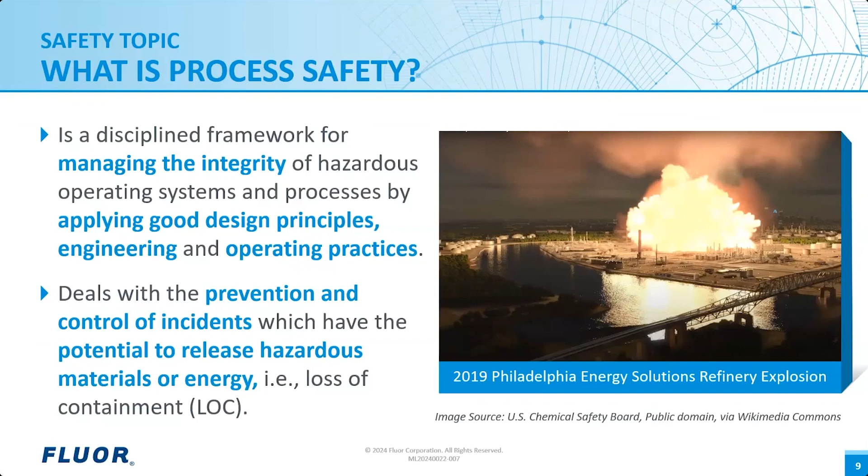To assess the risk associated with the loss of containment scenarios, it is typical to perform quantitative assessments in addition to qualitative analysis, as it provides more detailed information which can assist in identifying the protection requirements of the facility. But before we dive into the differences of the two approaches, I would like to do a quick review of the definition of hazard and risk. Most of the time, they are used interchangeably, but their meanings are different.

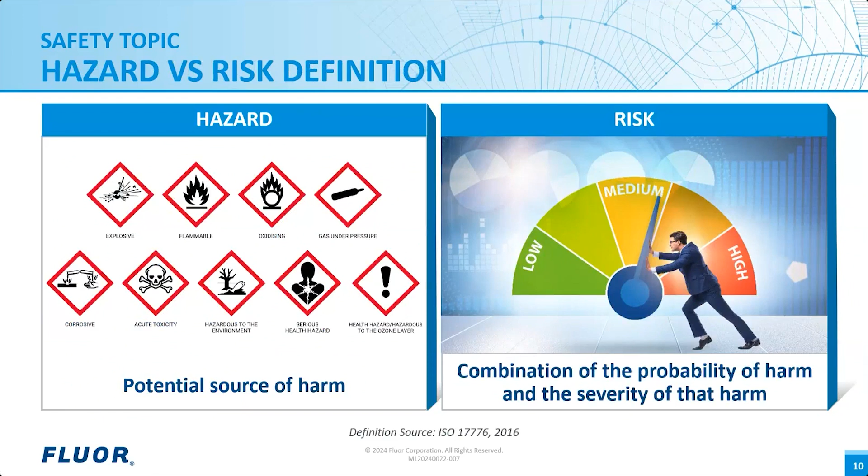Hazard is basically a source of harm, and risk is a combination of the probability of a hazardous event and the consequence of that event. More on risk. Risk is a product of probability and consequence. Probability is basically the likelihood of an incident occurring, and consequence is the severity of the outcome following the release of hazard. It can be, say, if we are talking about impact to personnel, minor injury to fatality.

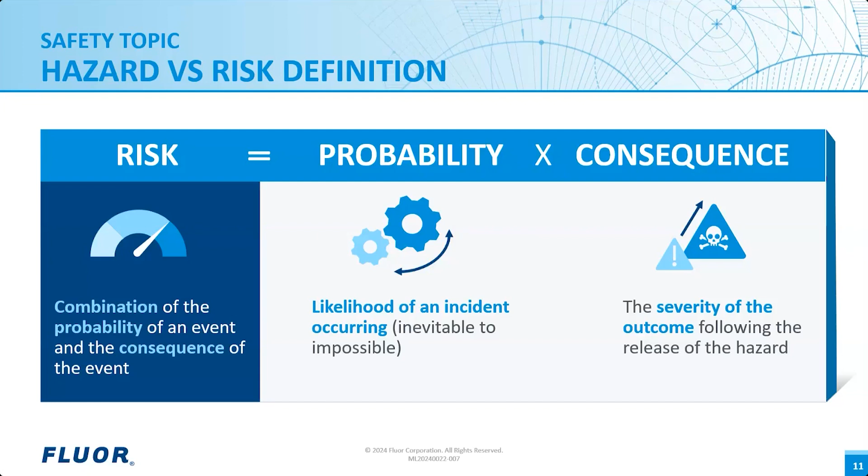Consequences associated with these leaks are modeled, but no frequency analysis is performed. Based on the consequence modeling result, specialists will check if the consequence criteria is being met. For example, if the consequence criteria for emergency equipment is 15 kilowatts per meter square, and based on fire modeling, the emergency equipment is outside that contour, then no additional protection is recommended.

As for the risk-based assessment, this will consider the full range of representative leaks, from small leaks to full rupture. Consequence modeling will be conducted for the full range of leak sizes. Frequency analysis for all representative leaks is performed to determine releases, ignition risk, and the frequencies, etc.

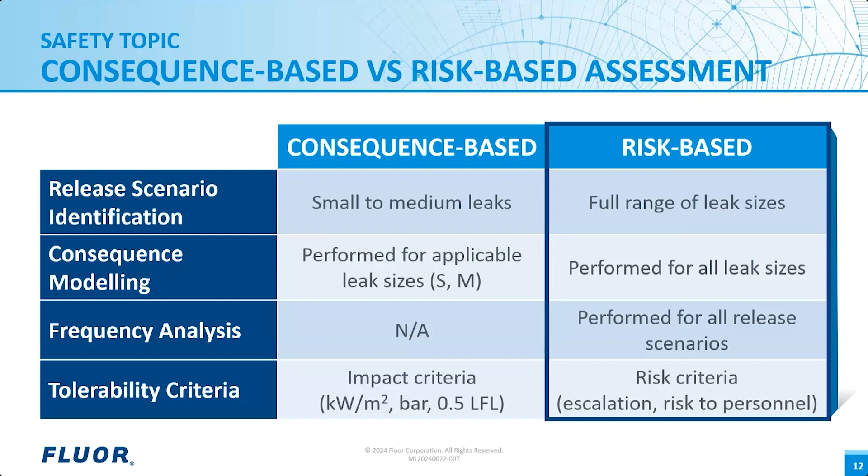To begin, let's go through the objectives of the presentation. Process safety revolves around keeping hazardous fluids inside process systems, or in other words, containing the materials. Loss of containment incidents, which are also referred to as LOCs, can range from a minor flange or pump seal leak to a catastrophic rupture of piping or equipment. Both the severity of these events as well as their frequencies can vary. Undertaking the right hazard and risk assessment enables the project team to examine the effects of the full range of LOC events and provide risk reduction measures to manage the risk associated with them.

Each of these HSE assessments have their specific objectives and are tailored for specific leak size events. This presentation shares a holistic view of how the full range of LOC scenarios are covered by various hazard and risk assessments that we perform at Fluor. It aims to help you understand the objectives of different assessments Design HSE performs, as well as their scope and limitations.

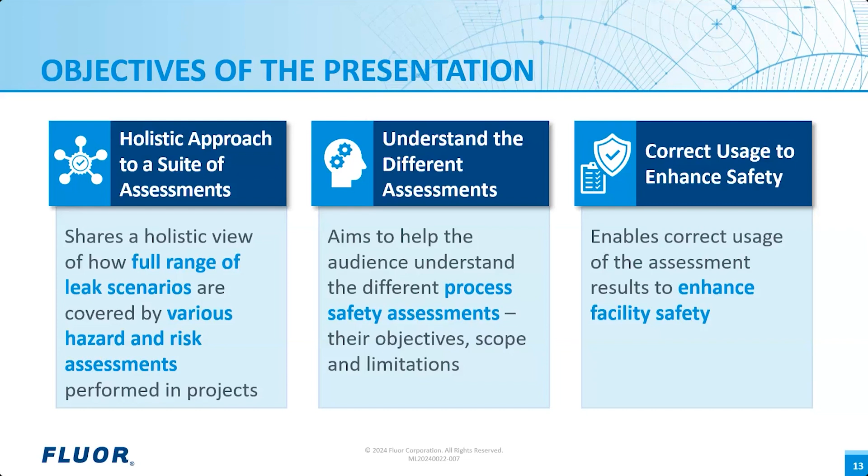Today we will present a selection of HSE assessment methodologies, explain what they are, and to which leak sizes they apply. We will discuss hazardous area classification, process hazard analysis, layer of protection analysis, HSE input to facility siting and plot plan development, fire safety assessment, critical building risk assessment, and finally, quantitative risk analysis.

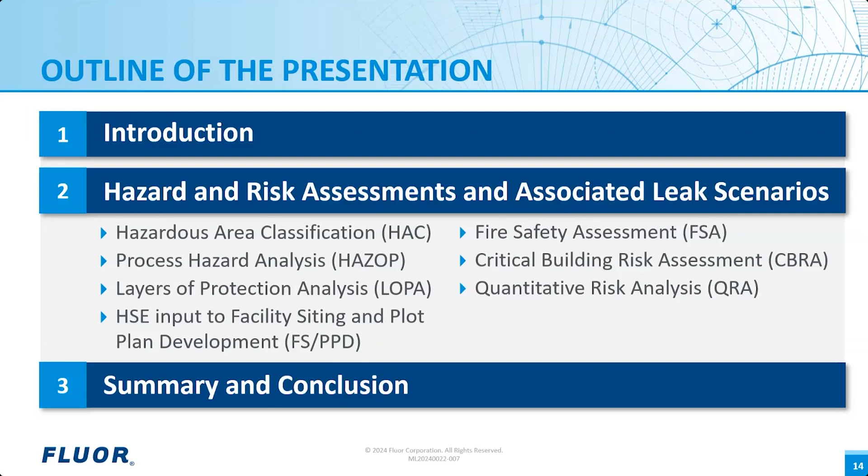Reducing risk can be achieved by reducing either of the two components, the severity or the likelihood. The preference is to reduce the potential severity of an event and make the process inherently safer. For example, eliminating certain hazardous substances altogether or reducing the inventories. Now, if the potential severity cannot be reduced, the likelihood should be reduced. So for example, adding a PSV does not completely eliminate the risk of overpressure and subsequent vessel rupture, but they do reduce the likelihood that this actually happens.

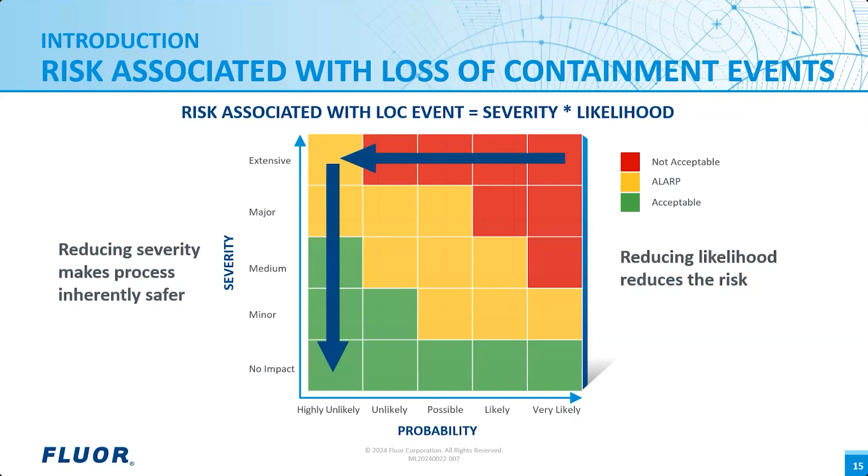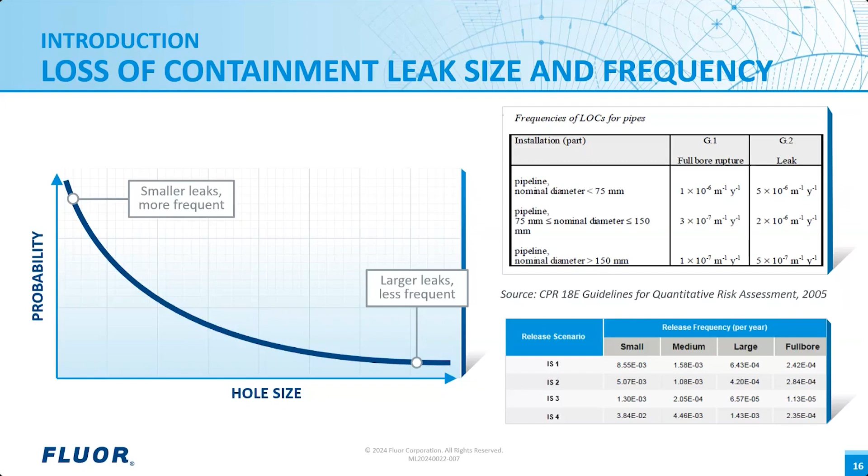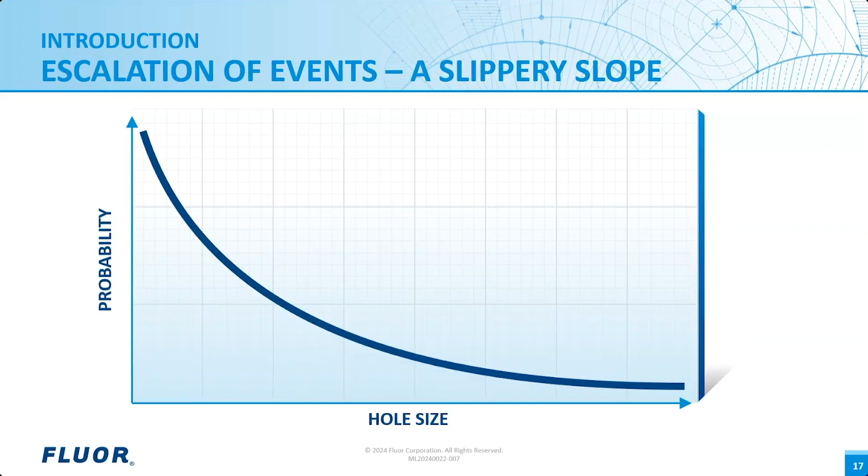So we saw that large leaks are unlikely compared to smaller leaks. However, if small leaks are not identified and left unfixed, these can escalate into bigger events with more severe consequences. This is also referred to as the domino effect. And therefore, hazard and risk assessments should also address small leaks to help prevent, reduce, or delay events from escalating into bigger events.

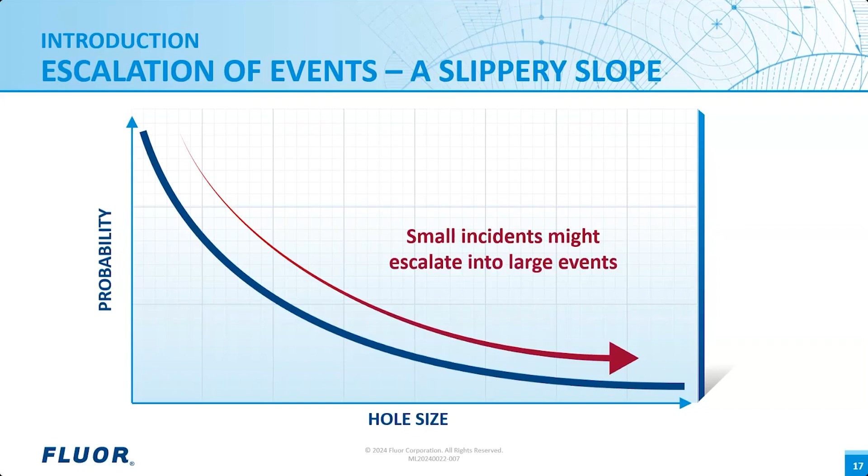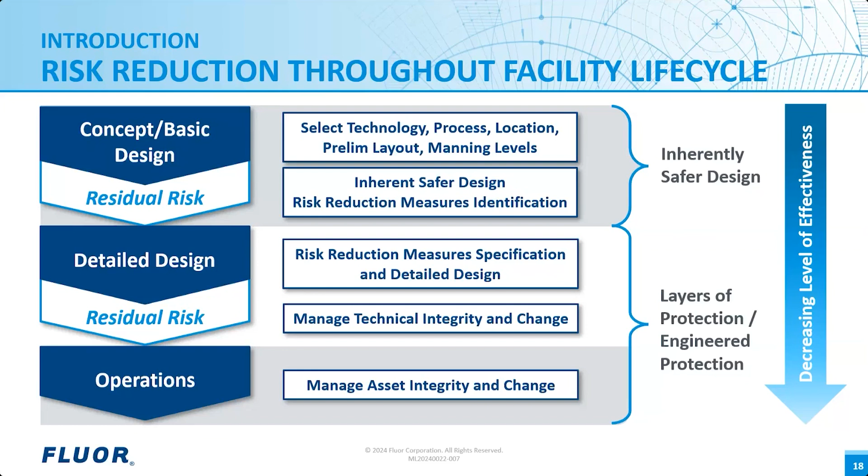Risk associated with process safety hazards need to be managed throughout the life cycle of the facility. Fluor, as an EPC contractor, is heavily involved during conceptual, basic, and detailed design, as well as during the construction phase of the facility life cycle. As seen in the middle of this graphic, several assessments are performed to understand the hazards and the risk associated with loss of containment events in our projects during the design phase. These assessments are also performed to determine the risk reduction measures or safeguards that need to be implemented in the design. So how do we assess risk associated with LOC incidents in our projects?

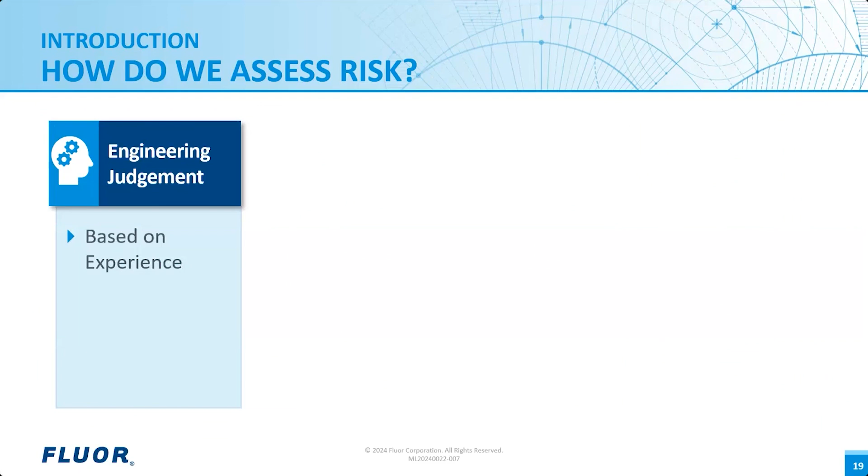Remember, risk comprises the likelihood an event occurs combined with its severity. So first, it can be done mainly based on experience and engineering judgment. This is typically a multidisciplinary team exercise. Some of the tools we use employ a qualitative approach, such as PHA or process hazard analysis and hazardous area classification. A semi-quantitative approach can also be applied, wherein some of the risk parameters are quantified based on specialist or team's experience, and some calculation is undertaken to determine the frequency of the event. Layer of protection analysis, or LOPA, is an example.

And finally, a fully quantitative approach can be applied, wherein the severity of consequences is quantified using consequence modeling, and the overall risk to personnel is quantified as the probability of a fatality per year. The Quantitative Risk Assessment, or QRA, is an example of such an assessment.

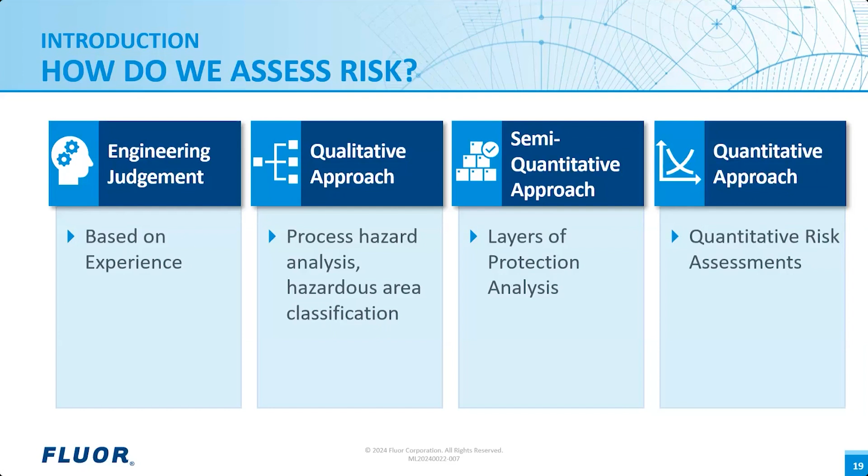As a quick summary of the introduction, we discussed the risks associated with loss of containment events, the fact that smaller leaks occur more frequently than larger leaks, and the use of risk assessments to facilitate the risk management process. Let's now move forward to discuss hazard and risk assessments we typically perform on projects.

The first step in any risk assessment is hazard identification. This is a critical step in the risk management process since you cannot manage what you don't know. One needs to understand hazards associated with the substances and services at the facility. This includes identification of properties such as flammability and toxicity.

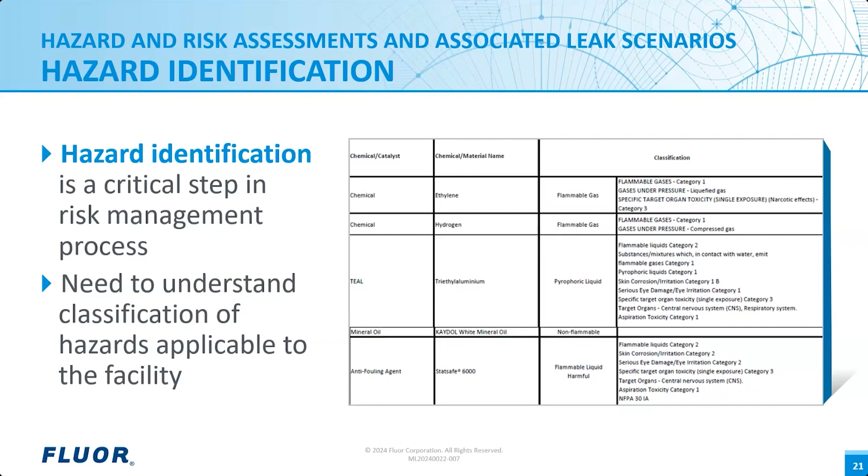The first assessment is the hazardous area classification. Hazardous area classification is a qualitative assessment performed if flammable substances are handled in a facility. It is a method of analyzing and classifying the environment where a flammable atmosphere may occur. The main purpose is to facilitate the proper selection of equipment and instrumentation to avoid ignition of potential releases of flammable material. The original scope of the analysis was electrical equipment only.

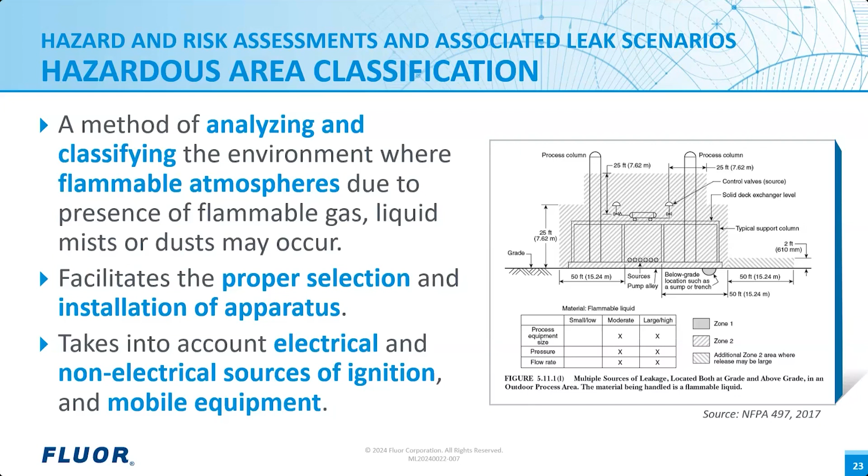It is now extended to also include non-electrical sources of ignition like hot surfaces and mobile equipment. We do this assessment to support management of ignition risks, considering the most likely leaks or flammable atmospheres present. Hazardous area classification starts by listing all substances handled at the facility and their flammability properties. Then, all sources of flammable releases are listed, such as vents, rotating equipment, and valves, as well as the type and extent of the classified area.

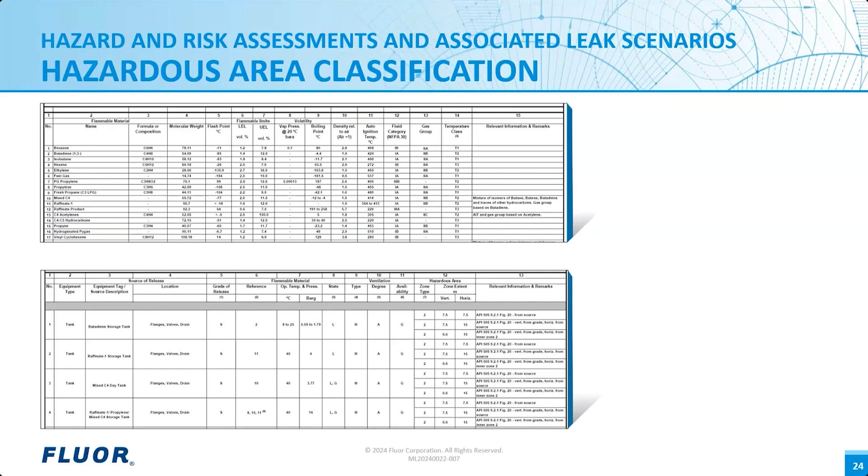Finally, a hazardous area classification drawing is prepared, which provides a graphical representation of the classified areas where flammable vapors may be present. This drawing is then utilized to properly select equipment and instrumentation appropriate for the type of flammable atmospheres.

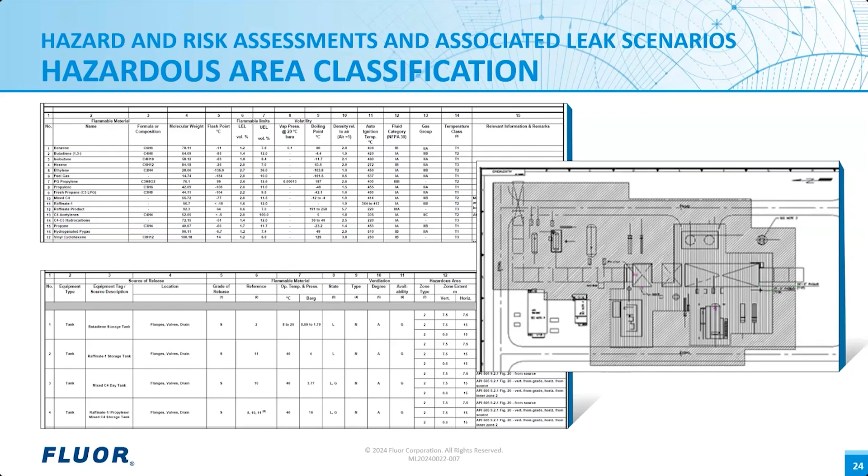Different codes and standards exist that can be utilized in determining the type and extent of classified areas. A few examples are the American Petroleum Institute, API, the National Fire Protection Association, NFPA, and the Energy Institute, EI. But other locations could have their own local standards.

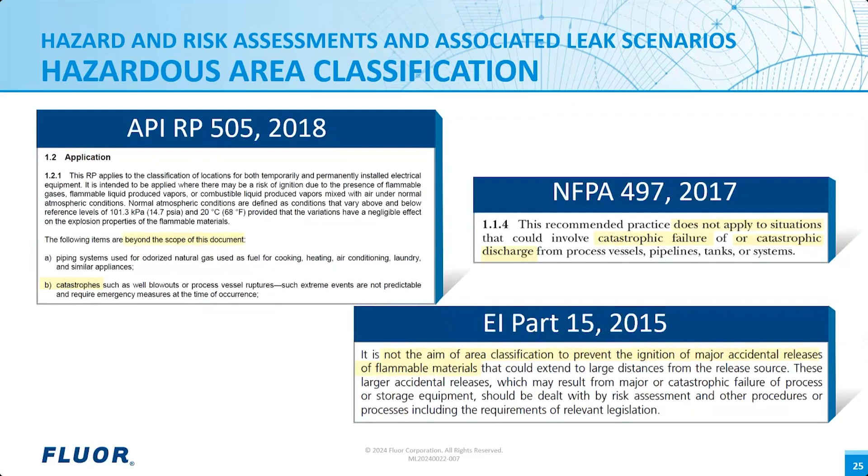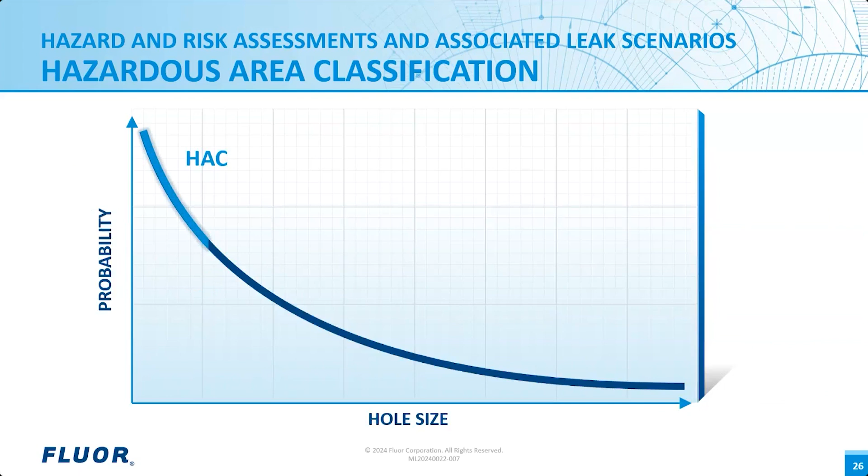Do note that per these standards, it is stated that major or catastrophic loss of containment events are not considered in this assessment. And therefore, in terms of leaks being considered in determining area classification, we consider fugitive to small leaks only for area classification. The assessment aims to minimize the ignitions of the most likely leaks in your facility.

Then, the next assessment is Process Hazard Analysis, or PHA. Process Hazard Analysis is a structured, systematic examination of a process in order to qualitatively identify and evaluate risks. It helps determine if risk reduction measures or safeguards are sufficient to control the risk.

Typical PHA methodologies used are HAZID, or hazard identification, the what-if review, or a checklist-based review, and the hazard and operability, or HAZOP review. So although several PHA methodologies exist, we will focus on the HAZOP methodology today.

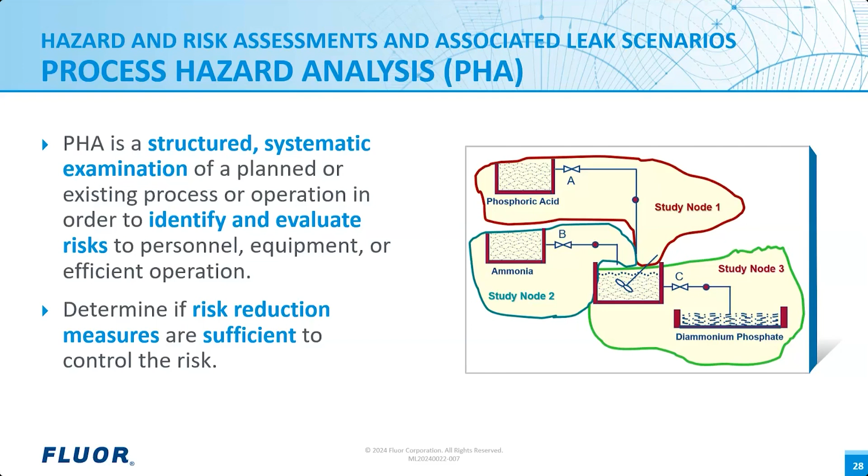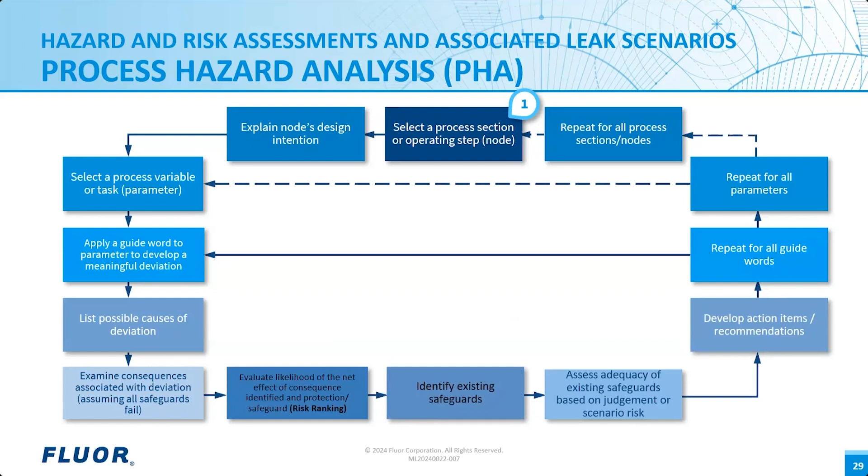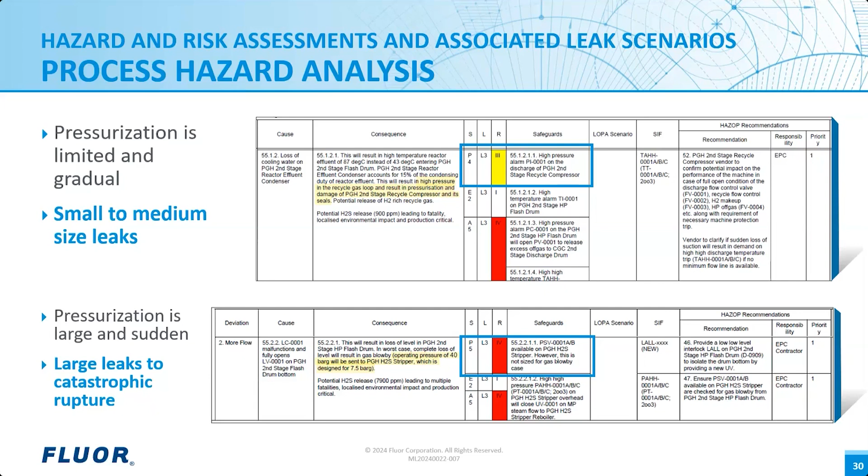The second case describes a sudden pressurization of more than 5 times the design pressure. Equipment and piping systems exposed to such overpressure are typically assumed to rupture catastrophically, with potentially multiple fatalities as a result. And hence, based on the example provided, HAZOPs can cover all potential leak sizes, from minor leaks all the way to full-bore ruptures. The next assessment is Layers of Protection Analysis, or LOPA.

LOPA is a simplified form of a semi-quantitative risk assessment that uses order of magnitude categories for initiating event frequency and independent protection layers. It calculates the frequency at which the event occurs based on the assumption that an initiating event should occur while also all independent protection layers fail simultaneously. Because if one safeguard functions, the incident is prevented.

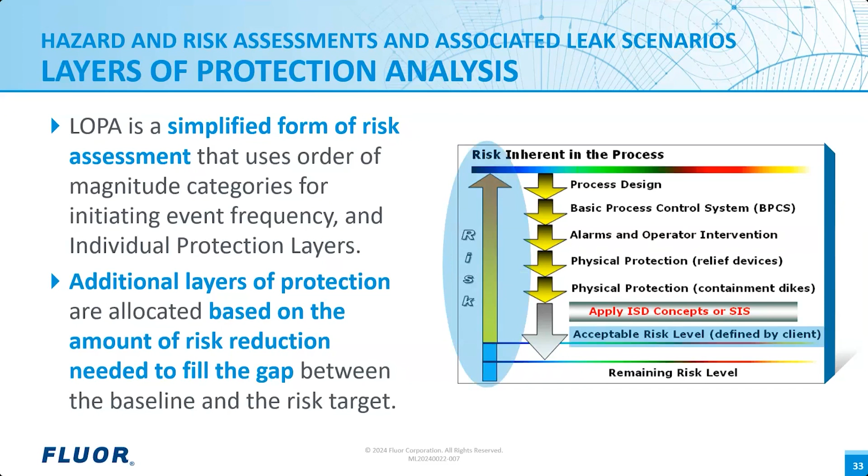Additional layers of protection are allocated based on the amount of risk reduction needed to fill the gap between the calculated frequency and the risk target, as you see in this figure. So the concept is that there is this risk associated with the scenario, and it needs to be reduced to an acceptable level. IPLs will be applied to reduce the risk to meet this level.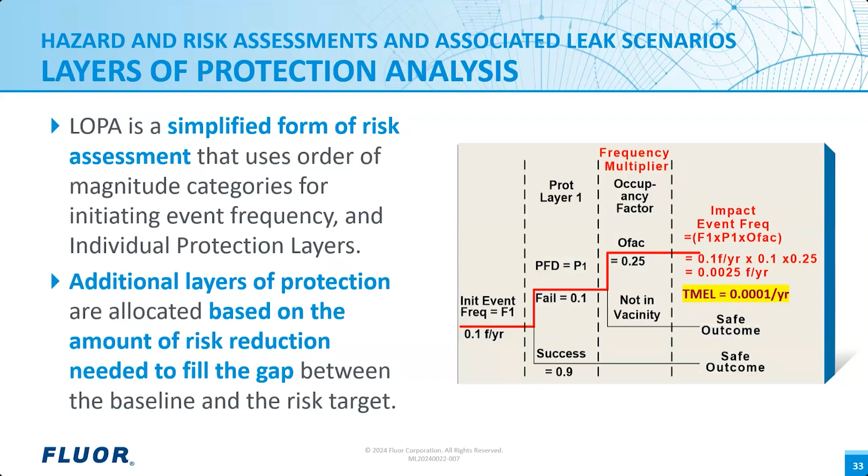This is an example of a LOPA calculation. The event frequency calculated exceeded the target likelihood TMEL of the event, and therefore additional independent layers of protection need to be added. LOPA takes input from the HAZOP review that we discussed earlier. The criteria to determine which HAZOP scenarios need to be subjected to LOPA is determined by our clients. This slide shows an example of the selection criteria.

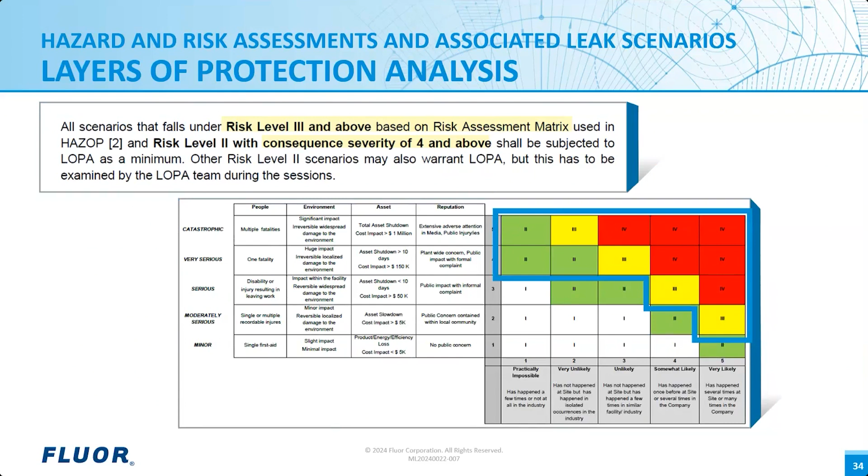As you can see, the scenarios being assessed in LOPA are associated with high risk and severe consequence events. And therefore, LOPA covers larger leak sizes which can result in severe consequences, typically ranging from medium-sized leaks to full-bore catastrophic ruptures.

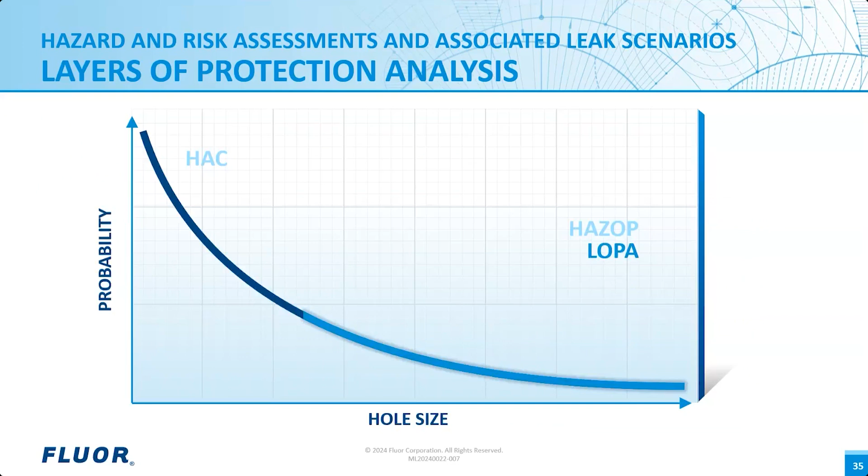And for the next assessments, I will turn it over to Veronica to further discuss. Thank you, Oscar, for covering the first three assessments. So to continue, let's discuss the assessments we perform to provide input to facility siting and plot plan development.

HSE input in layout development implements inherently safer design concepts, one of which is the concept of segregation. The objective is to ensure that the hazardous facilities are located with sufficient distance from the critical targets on site and sufficient distance from off-site population and other off-site sensitive receptors. In addition, plot plan is developed to minimize the risk of escalation of events through the provision of adequate separation distance between adjacent process units.

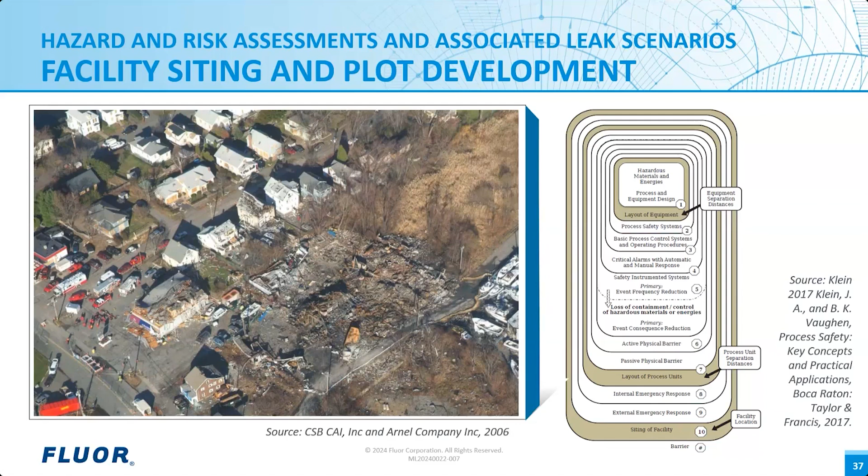When selecting the location for a facility, one of the typical safety considerations is the impact of the facility to receptors external to the plant. Acceptability criteria comes from local regulations and applicable codes and standards, and they are often expressed in consequence-based and risk-based terms.

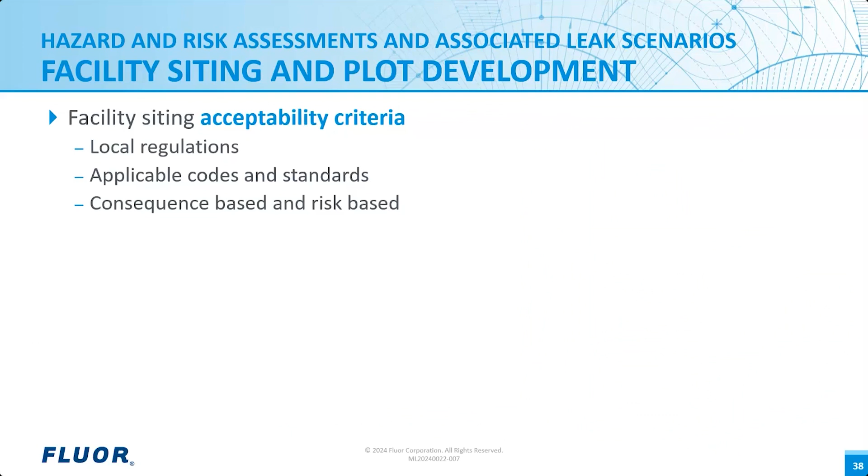However, we have to note that when we use these lookup tables, it only provides spacing requirement considering fire effects and does not cover blast and toxic release impacts. So to address this, in some projects, we conduct modeling of these scenarios and typically consider small to medium-sized leaks.

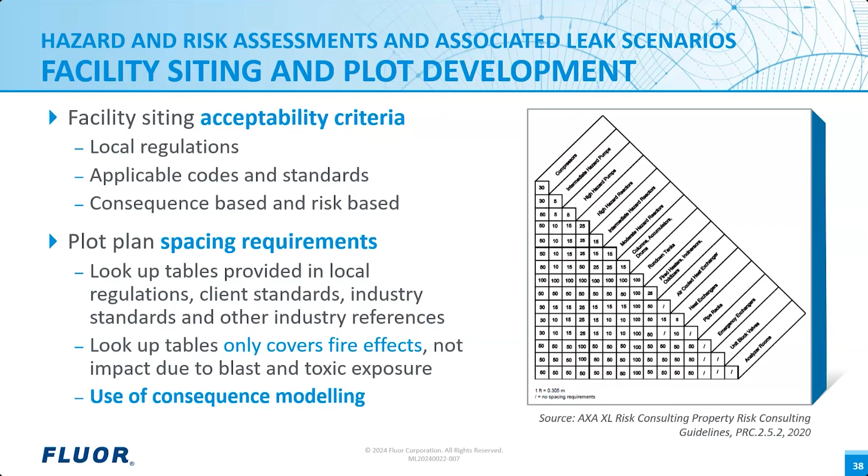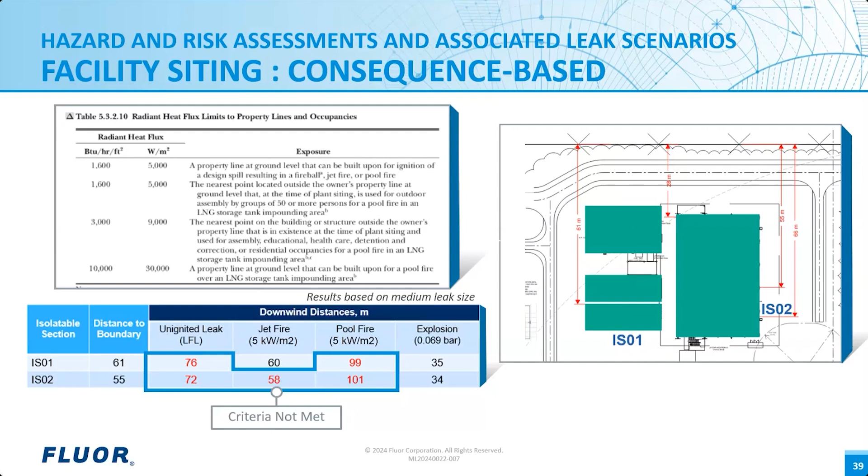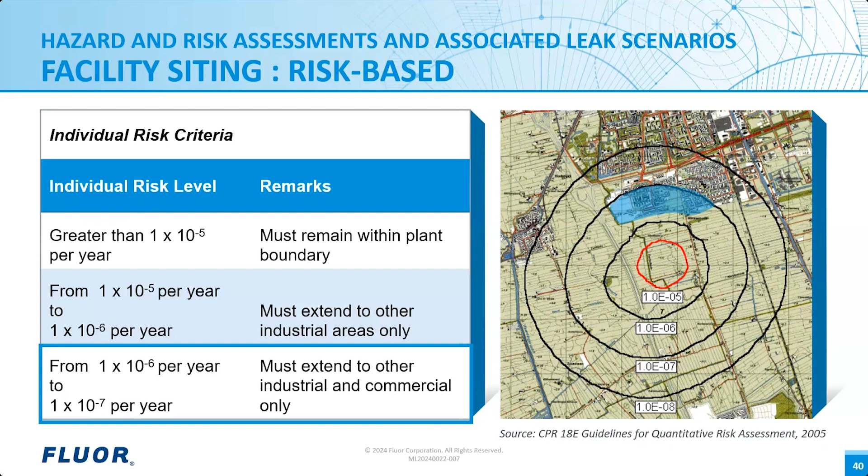You can also observe that there are some facilities that are shown within the 1E-7 per year contour. However, this area is part of an industrial complex. So the facility siting is still compliant with the criteria, as it indicates that an industrial complex can be within the 1E-7 per year contour. So these contours that you see on the right side are generated considering the risk associated with the full range of leak scenarios from the facility.

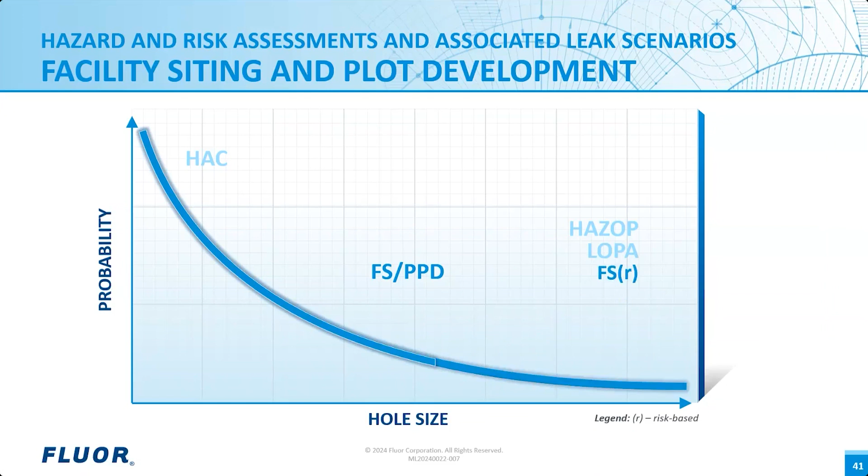So in terms of where these assessments fall into the graph, consequence-based determination of the separation distances required considers most likely events. That's typically up to medium-size release scenarios. However, for the risk-based approach, that's applied mainly for facility siting, all release scenarios are considered in the assessment.

Fire safety assessment is the next on the list. So we do fire safety assessments on projects to confirm adequacy of the active and passive fire protection systems provided. So fire safety assessments can be done qualitatively, meaning the protection requirements are based on the review of the service classification, the applicable codes and standards, as well as the protection philosophy for the project. So the main intent of this assessment is to control the initial event to prevent it from escalating into a severe event. Therefore, the scenarios considered are the most likely scenarios, again, the small to medium-sized leaks.

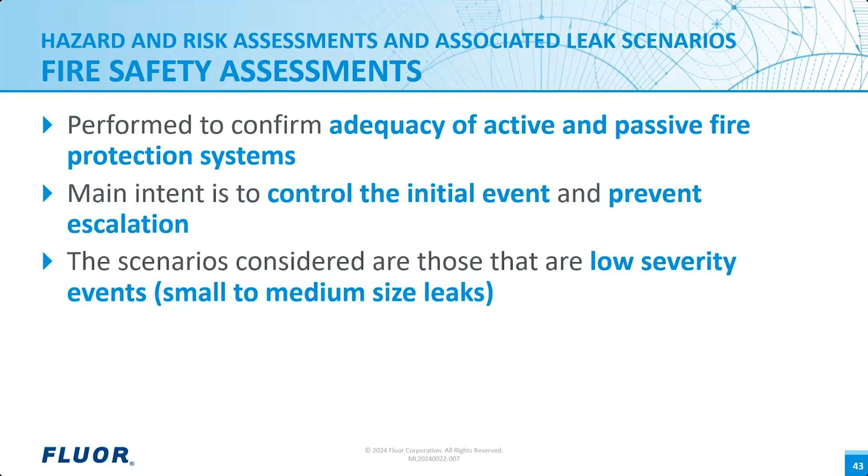If the project intends to apply a scenario-based fire protection system, consequence modeling results can be used to confirm the design basis of the fire protection system. Similarly, this will typically only consider up to medium-sized releases, as the fire protection systems in most cases are not designed for worst-case events. However, it is also not uncommon to use a risk-based approach where the full range of leak cases are considered. This is typical in offshore facilities and sometimes also applied onshore, for example, determining the passive fire protection required against jet fire events.

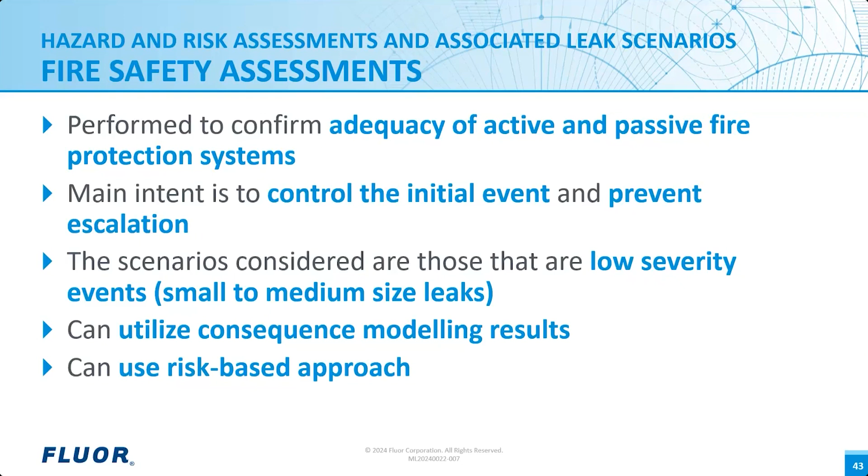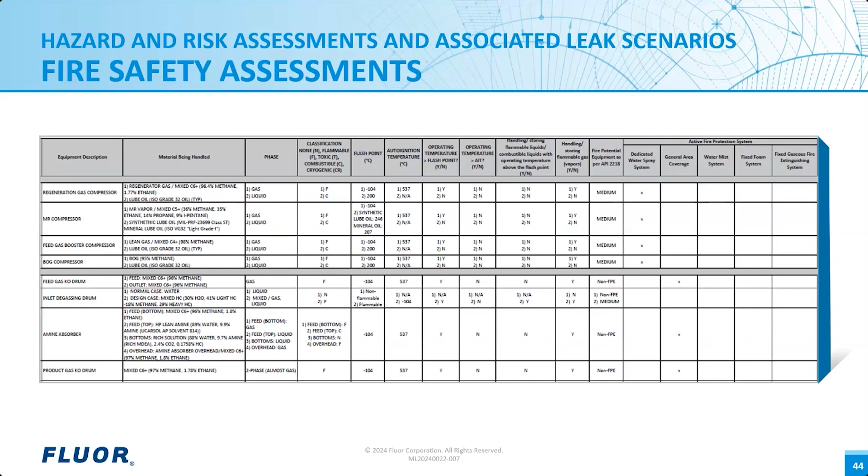This shows an example of a fire hazard equipment list that we prepare for projects, and it is sometimes called qualitative fire hazard analysis. And the process of preparing this employs a qualitative approach, wherein the entries are based on project protection philosophy and understanding of the fire risk associated with the substances being handled, while also considering the operating parameters. So the main objective is to prevent event escalation. Therefore, it considers most likely but low severity leaks. This analysis determines the fire protection which will be provided for the equipment and hence for the facility.

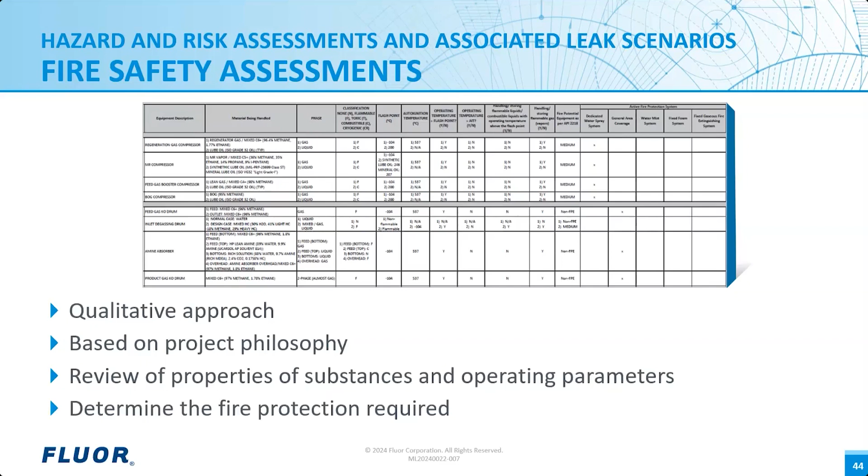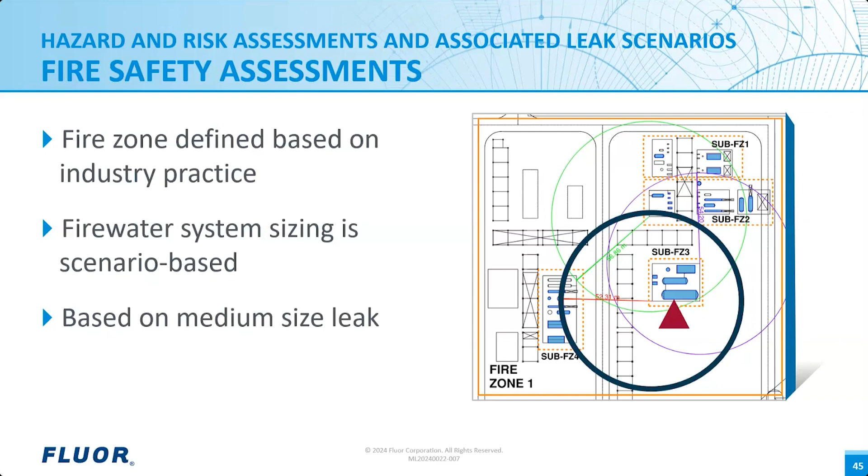The circles you can see on the figure represent the area wherein high radiation from a fire is expected. Say, if you have a fire from sub-fire zone 3, the active fire protection system on the equipment within the circle needs to be activated. This enables a project to use fire scenarios from each sub-fire zone to determine the fire water demand the fire water system is required to be designed for. So doing this, the resulting fire water demand came within the existing fire water system capacity.

So in terms of fire safety assessment, if a consequence-based assessment is applied, it will typically consider small to medium release scenarios. And the main focus is preventing escalation of small releases to become larger events. In case in a project a risk-based approach in determining protection requirements is to be implemented, this considers the full range of the release scenarios.

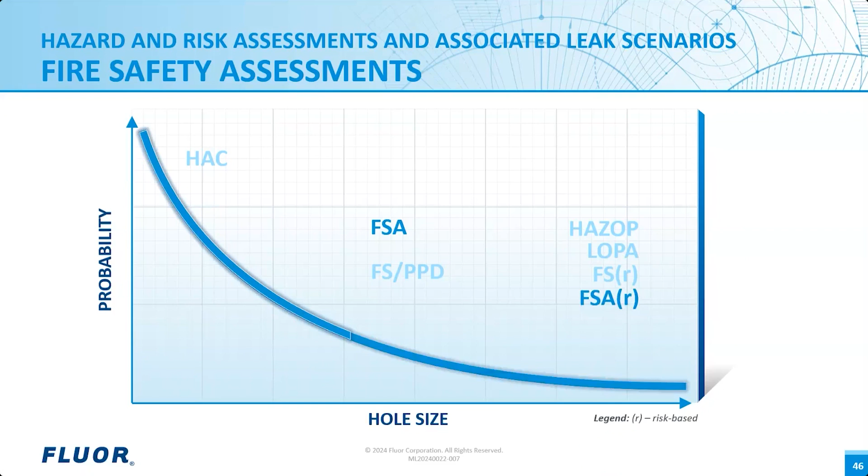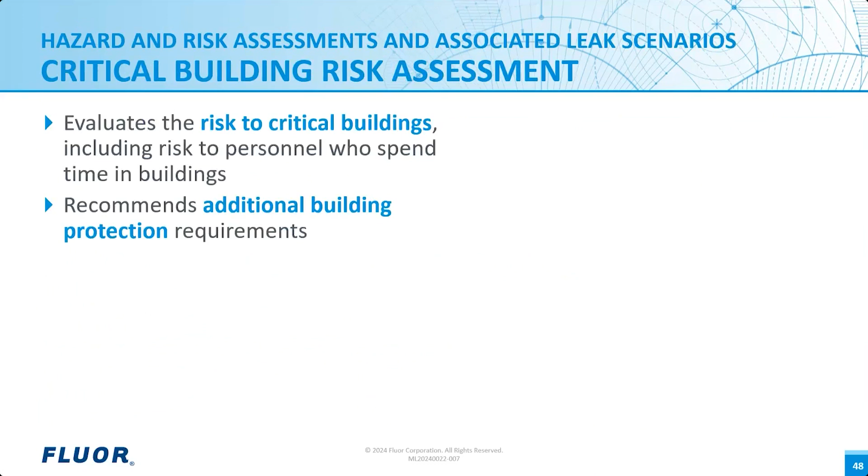To continue on with the list, the next is the critical building risk assessment, which evaluates the risk to critical buildings. So occupied buildings are the typical receptors considered in this assessment, wherein risk to personnel who spend time inside the building is evaluated. But there are also some cases wherein there are buildings that are housing critical equipment, such as those used for emergency purposes or those that need to continue to function during the emergency event. So those buildings housing that critical equipment are also considered in the assessment.

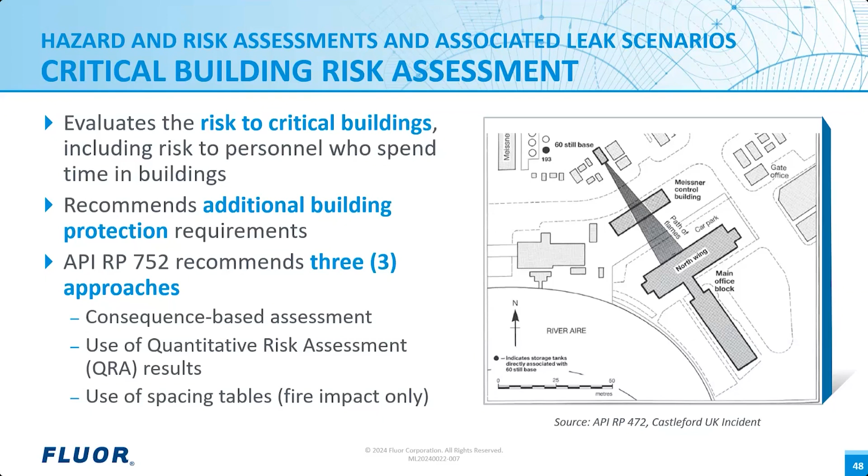API RP 752 recommends 3 approaches which can be utilized in performing the assessment. The first approach is the consequence-based assessment, wherein typically we consider small to medium-sized leaks. And then the use of quantitative risk assessment results, wherein all leak scenarios are considered. And then the use of spacing tables. But again, this is only considering the fire impact.

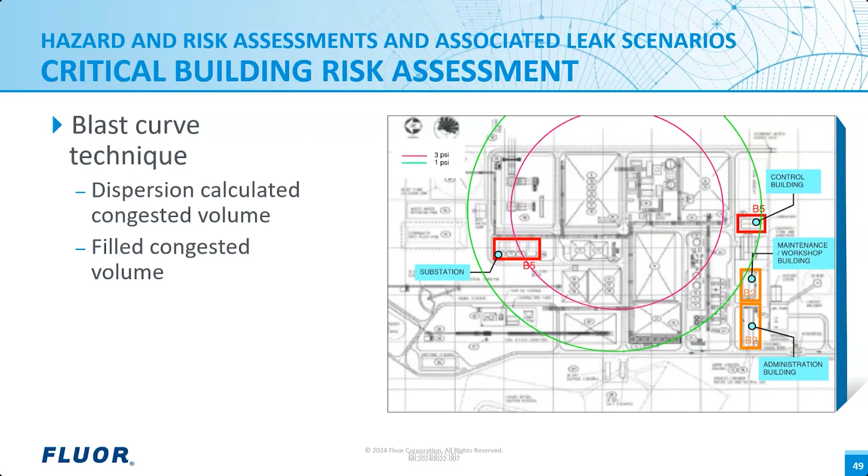So in this example, administration and maintenance workshop buildings are of B2 type, and B2 type is a steel frame with metal siding with critical overpressure typically around 1.5 psi. As for the control building and substation, they are of B5 type, and B5 type is a blast-resistant building with critical overpressure of around 4 psi. So as shown in the results on the right side, most of the buildings are sited outside their critical overpressure contours.

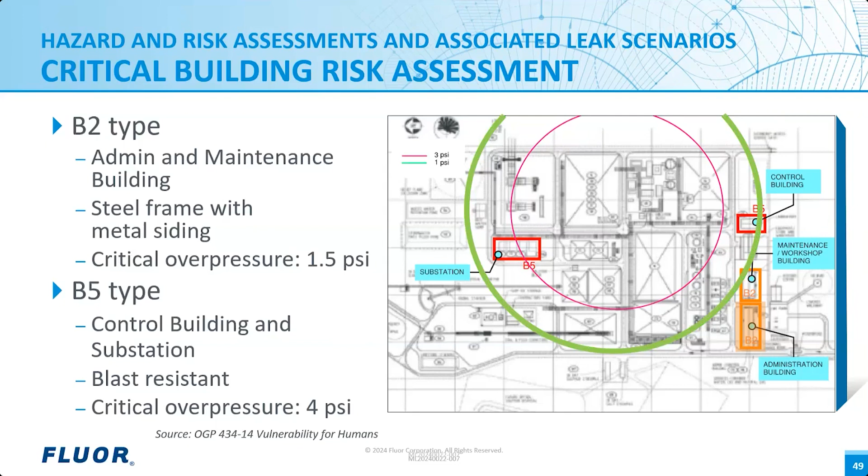So for example, if we look at the administration building, it has a critical overpressure of 1.5 psi, and it is outside the 1 psi contour. So that means that the overpressure load that is expected at that point is below 1 psi. Therefore, it is designed and considered sufficient to protect the personnel or equipment within it.

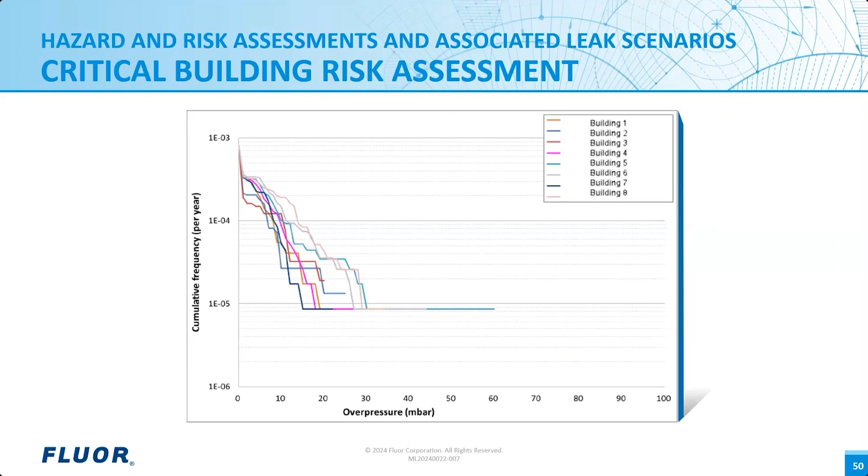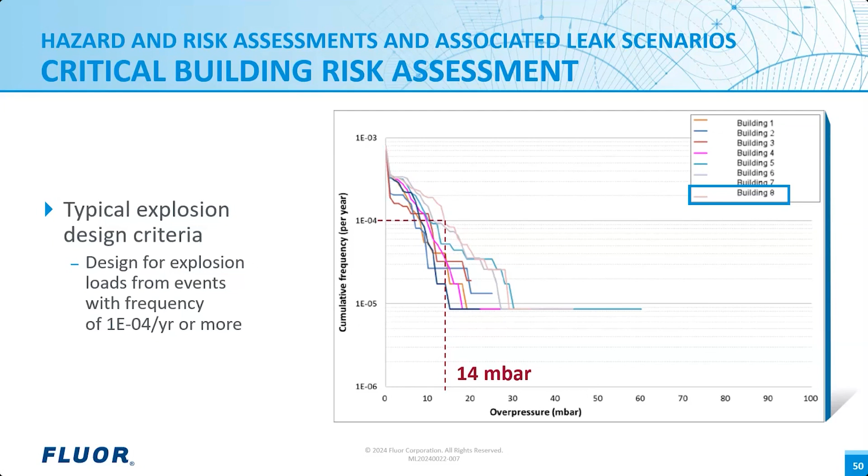The typical criteria considered for critical buildings is that they need to be designed for explosion loads from events with frequency of 1e-4 per year or more. So these results are generated considering leaks from the full range of hole sizes. So for example, if we take building 8, the side-on peak overpressure is around 14 millibar. So this will then be checked against the overpressure that building 8 can withstand to confirm if redesign or structural strengthening is required.

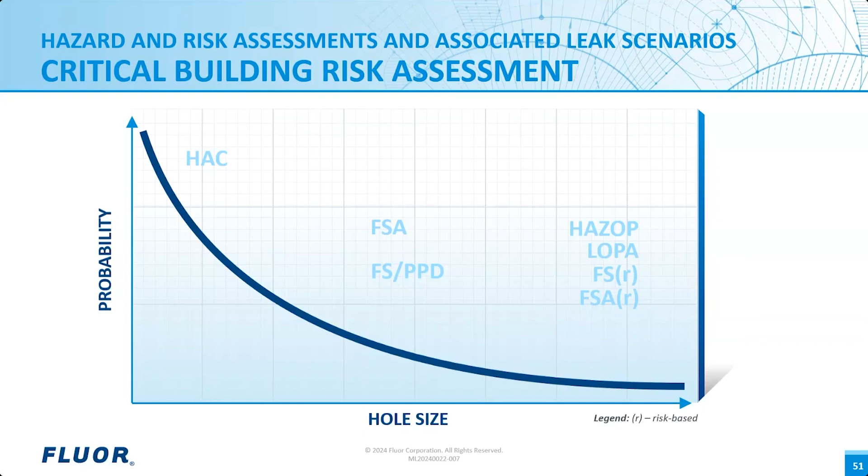So for CBRA, as the receptor being protected is most of the time occupied buildings, even if the approach applied is consequence-based, the worst case scenario is typically considered specifically for explosion events. For fire and toxic releases, up to medium-sized releases are usually considered. For the risk-based approach, since it uses QRA results, it will be covering the full range of release scenarios.

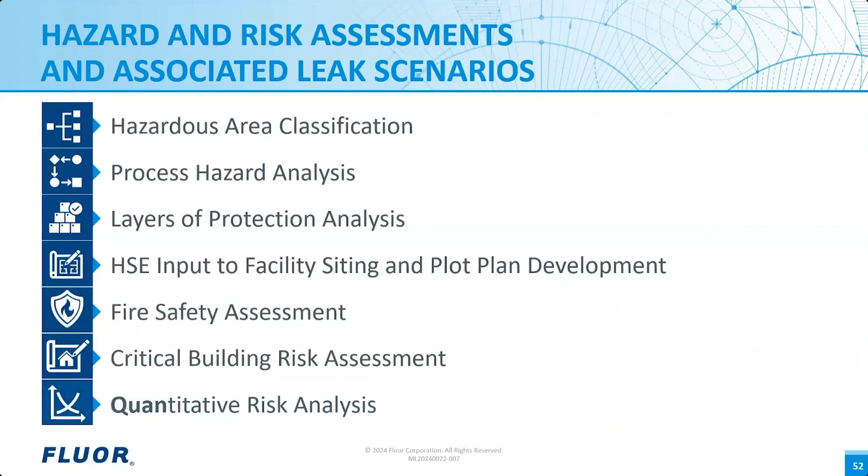Results of these steps are then combined to quantify risk to personnel, usually in terms of risk of fatality. The results are then compared to the tolerability criteria, either set by local regulators or applicable codes and standards. So mainly the QRA results provide information on whether the risk level of the facility is within the range of what is considered tolerable by the industry.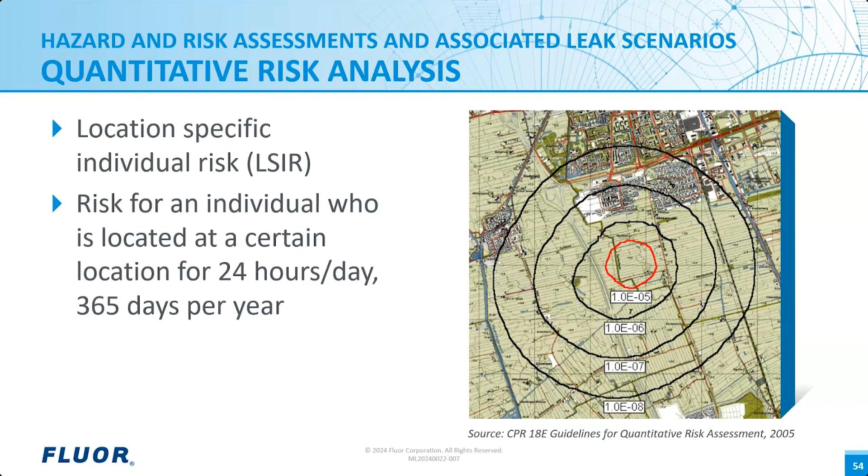So for QRA, it will cover the full range of release scenarios. So to recap, what leak scenarios are being covered by the risk assessments we have discussed in this webinar? Hazardous area classification covers mainly fugitive emissions and small leaks. HAZOP, which is a qualitative assessment, could cover the whole range of leak scenarios. For LOPA, because of the criteria being used to determine which scenarios will undergo LOPA, it considers medium to catastrophic leak scenarios.

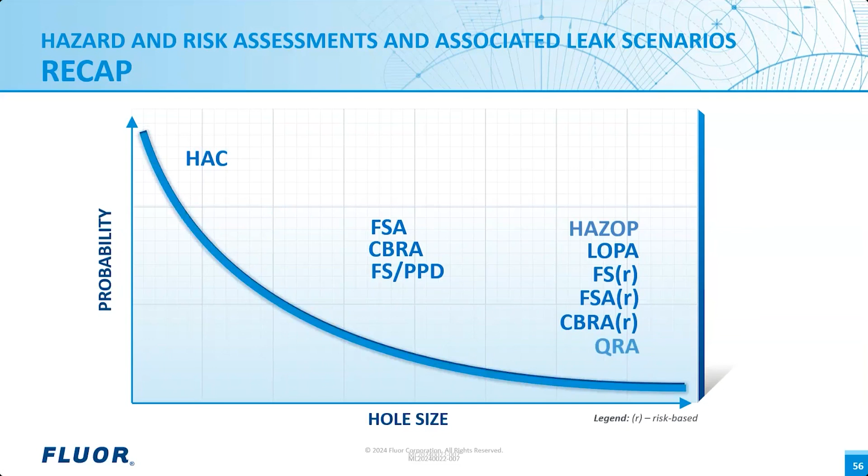HSE inputs to facility siting and plot plan development, as well as fire safety assessment, depend on the approach being applied. So it can consider up to medium-sized leaks only or can cover the full range of leak scenarios. For CBRA, for explosion impact to buildings, usually we consider up to worst case events because, again, we're looking at an occupied building most of the time. But for fire and toxic release events, the leak scenarios considered depend on the approach utilized. And then finally, for QRA, the full range of leak scenarios are considered.

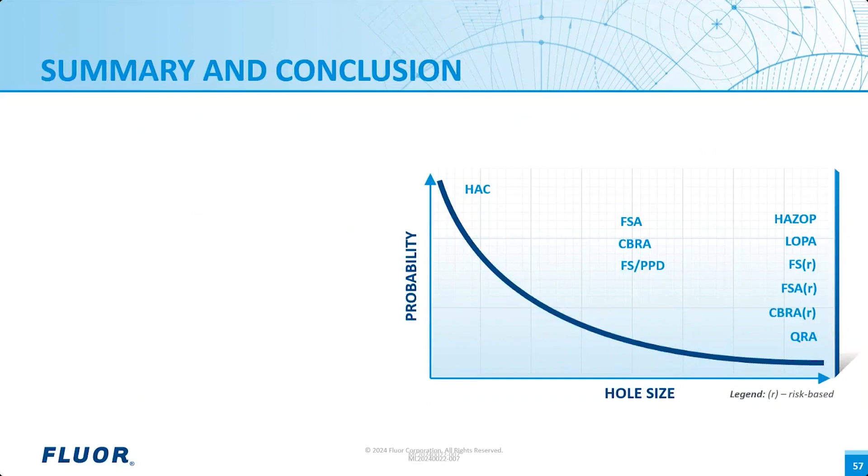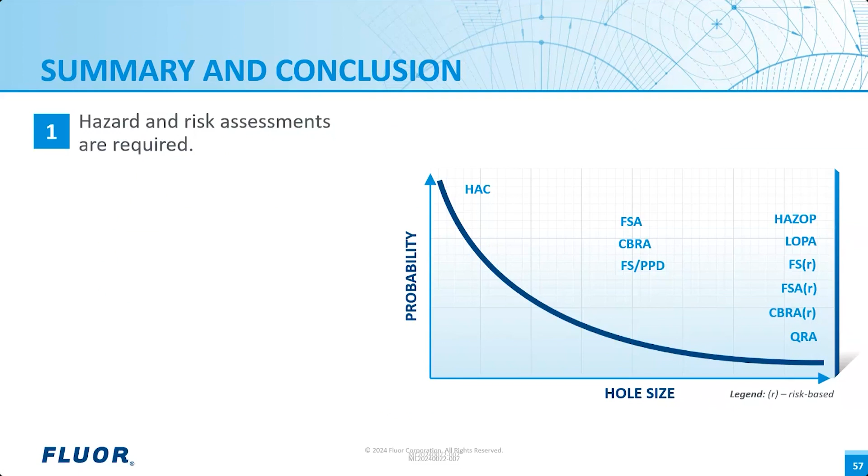So to sum up the main points that we would want to convey in this presentation, as part of the risk management process, hazard and risk assessments are required to provide detailed information to aid understanding of what can happen in case there is a loss of containment event and if they are not properly managed. This allows the project team, together with the operator or our client, to determine appropriate risk reduction measures required to manage risk to tolerable levels. Undertaking a combination of several risk assessments enables the project team to examine effects of the full range of LOC events and enables us to develop more thorough and robust risk reduction strategies.

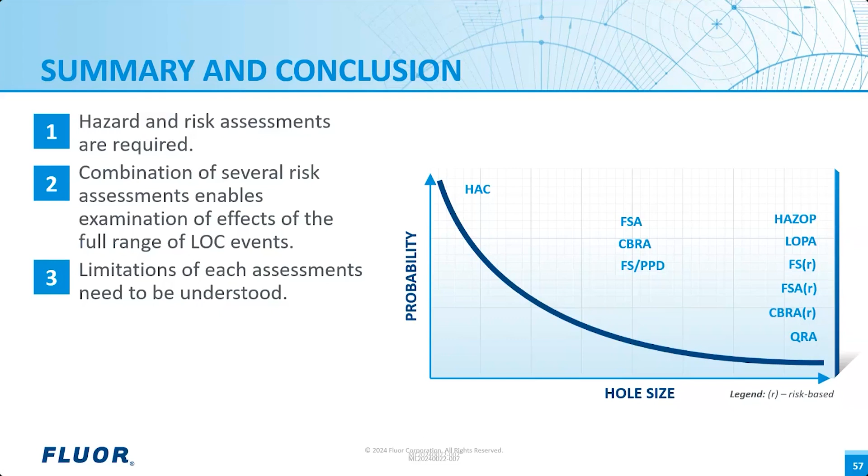So the figure you see on the right provides a visual summary showing that assessments are tailored to certain types of leak scenarios and events. And it is important to understand the limitations of these assessments so as to ensure that the right assessment is performed where appropriate. And finally, in deciding which assessments need to be performed for a facility, the assessments chosen should be aligned with the facility type and how risks associated with them are understood. In projects we perform in Fluor, we work with our clients to determine which assessments are appropriate for the project.